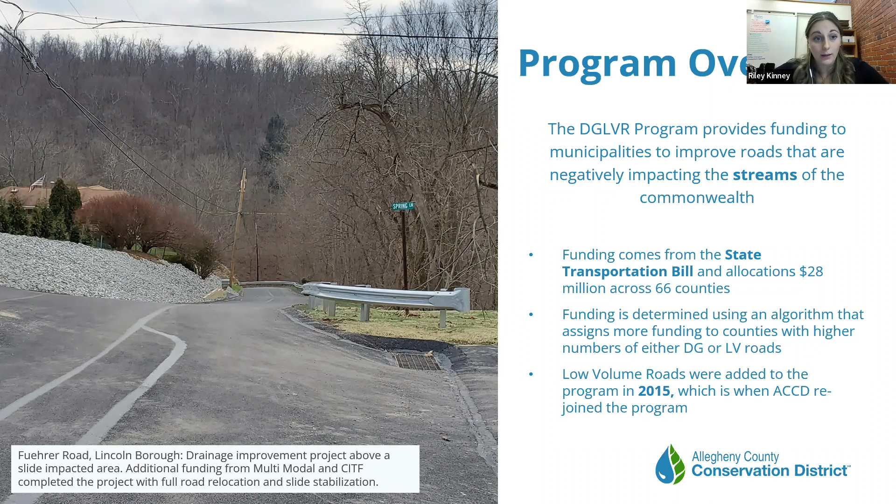The entire project involved drainage improvements on the upslope side of the road and relocating the road away from a slide that had occurred. There were a few slides on this hillside, but there was one in particular that first drew our attention to the road, and it was really a team effort to get this project accomplished.

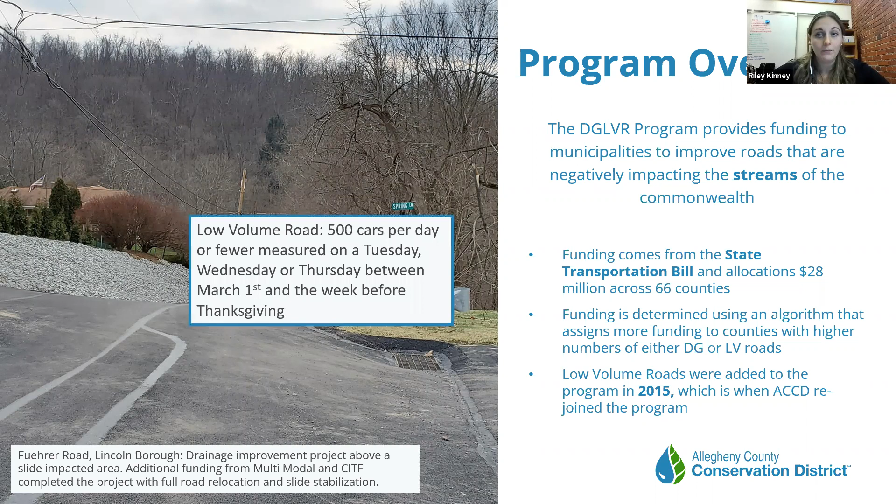In a typical year, Allegheny County's grant cycle opens June 1st and closes August 31st. We receive our program funds each summer and typically have $80,000 to fund dirt and gravel road projects and $215,000 to fund low volume road projects.

This year is a little bit special, so we are actually opening our grant cycle tomorrow, March 1st. We will be accepting applications on a rolling basis because we have more funding than ever to give to our municipalities. We have about $180,000 for dirt and gravel road projects and $600,000 for low volume road projects.

If this is your first time hearing about the program, or maybe you've had some ideas for projects in the past and haven't submitted an application, this is a really great year to get your project through the door because we have so much funding and we're really looking to help out as many municipalities as possible.

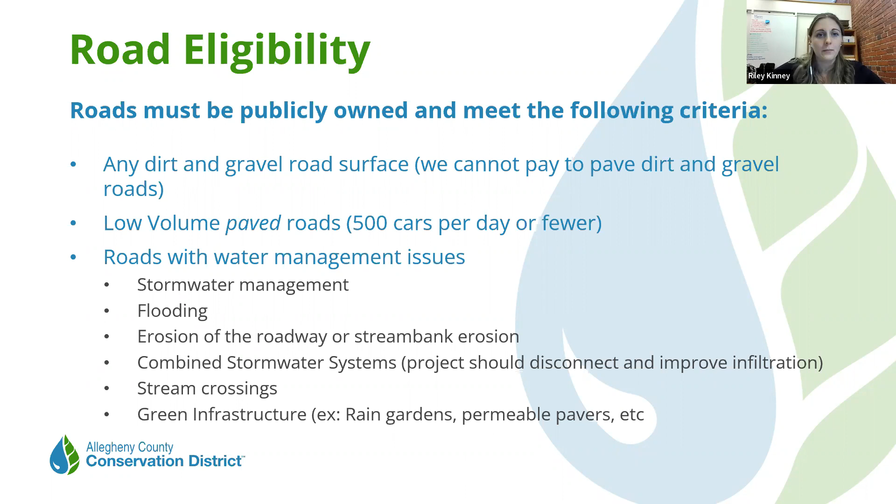I would categorize our applications that we typically receive in Allegheny County into three main categories. And this is what I'm really going to focus on for this presentation. But again, if you have another type of concern, like a stream bank stabilization project, or a dirt and gravel road that is really eroded and kind of falls outside some of the scopes of these drainage improvement practices, it's something that I would love to come out and take a look at, and we can talk through some solutions together.

So when we're looking at drainage improvement, we're looking at improving infiltration, disconnecting drainage patterns so that we're having a smaller volume of water exiting through our drainage features, reducing the amount of water on the road surface and also the water that could be saturating the road base. All good things that are great use for program funding.

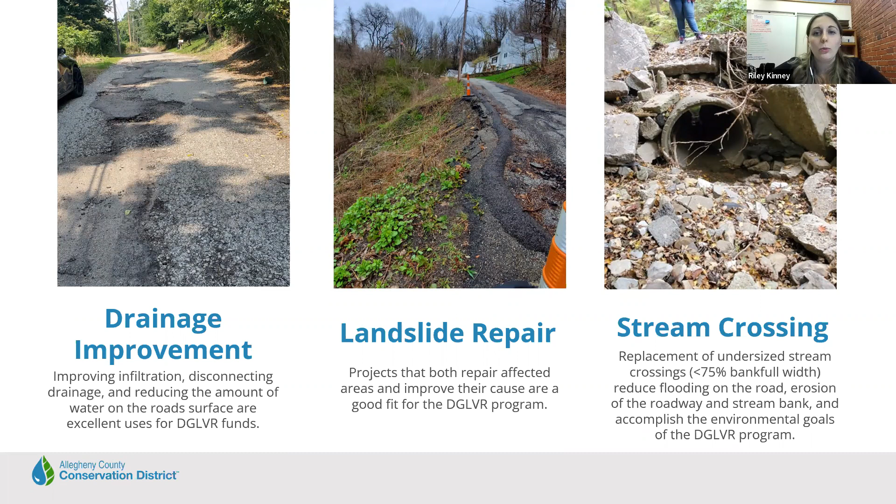Another really common project that we see in Allegheny County is a stream crossing replacement. This stream crossing is in Brentwood Borough, and we will be replacing this crossing coming up here in 2023. So any crossing that is not meeting at least the bankfull width of the stream, anything under 75%, that is eligible for replacement using dirt and gravel road funds. So replacing these undersized crossings can help to reduce flooding on the road, erosion of the roadway and stream bank, and then also, again, accomplishing those environmental goals of the program. So re-establishing natural stability in the channel, improving passage for aquatic organisms, and overall rehabilitating that stream environment.

When you're thinking about what kind of road project you might want to do, the first thing that you need to do is identify what kinds of roads you want to be looking at. And there's a couple different ways that we recommend you go about doing this. So, any road that might have water management issues, that's a really great place to start. But there are some other categories of roads that we might consider as well. How high does a road fall on your municipal priority list? Are there roads that are constant maintenance headaches, going out and unclogging drains or going out and patching the road time and time again because potholes are a major issue?

There could be roads that have really hazardous conditions, lots of icing, especially in the winters we get here in Pittsburgh. We have a lot of steep slopes, and controlling that water in the wintertime is really critical to making sure they stay safe. Or, maybe there's also a road where you have a lot of residents that are unhappy with their road condition. They say the squeaky wheel gets the grease, and sometimes that's the best place to start, is roads where you have a consistent number of complaints.

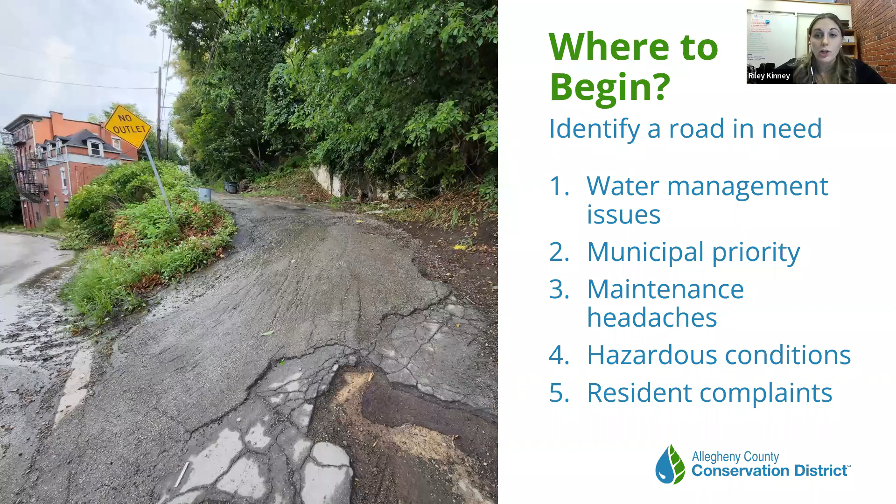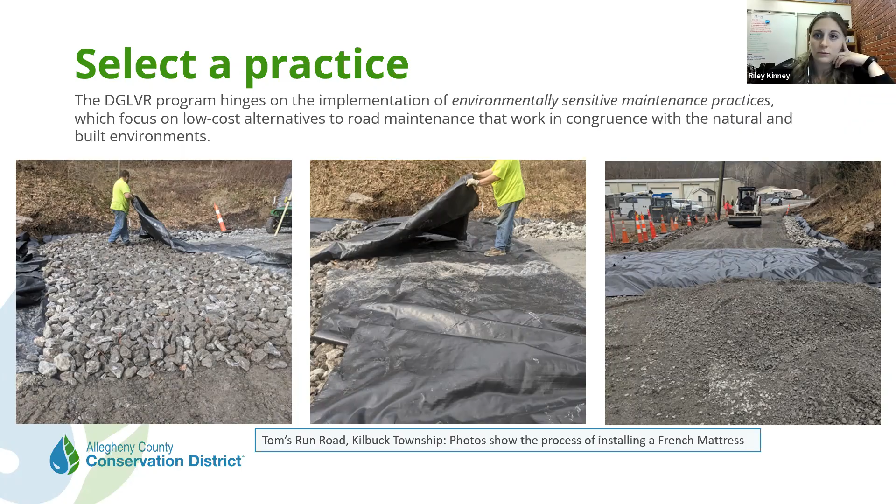The environmentally sensitive maintenance practices go beyond just a concept. It's also a certification that's required to apply for the grant program. The ESM training is offered through the Penn State Center for Dirt and Gravel Roads. It's 2 days, and they have locations across the state. It runs from 8 in the morning until 4 in the afternoon. Any municipal staff can attend, but we typically recommend someone who would be involved in project selection or road maintenance be the municipal representative.

This training is required to apply for the grant, but the concepts are really useful for general road maintenance. A lot of our municipalities here in Allegheny County are operating on small budgets, and so knowing a good set of tools in your tool chest that can be low-cost solutions to handle some of your big headaches is a really useful set of information to have.

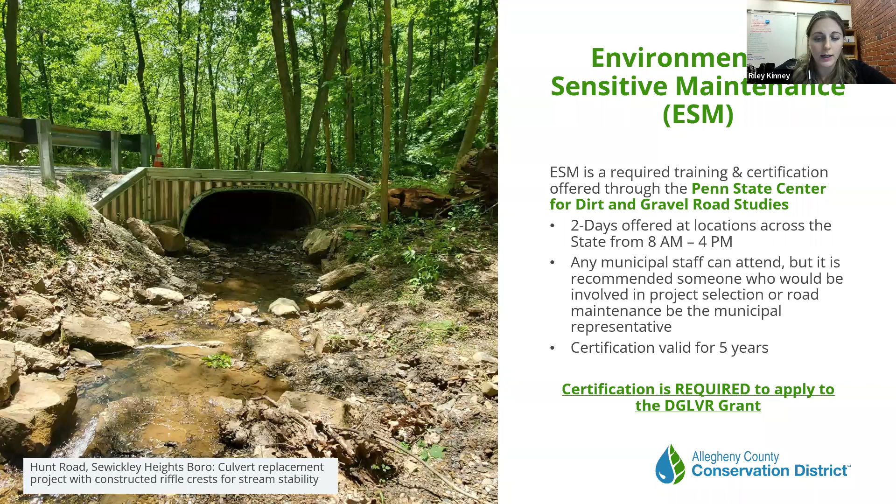If you're interested in signing up for an environmentally sensitive maintenance training this year, you're in luck, because there are a lot of excellent options that fit very well in our grant cycle. The first training date is going to be April 12th and 13th at Seven Springs. Anyone who's participating in the Allegheny League of Municipalities conference this year, this ESM training is the Wednesday, Thursday before the conference. So it's a great opportunity to do both and get a lot of information on resources for your municipality. But if you can't make that one, that's okay, because there will be another training offered on May 16th and 17th at the Pittsburgh Marriott North in Cranberry. And then later in the summer on August 16th and 17th at the Doubletree by Hilton in Washington County.

If it's the first time your municipality is going to be certified for ESM, ACCD is offering mileage and hotel reimbursement up to $300 so that we can get as many new people certified as possible. The certification lasts for 5 years. So getting it taken care of now, you can see how it helps you apply for the grant, and also the benefits of being able to incorporate those practices into your day-to-day.

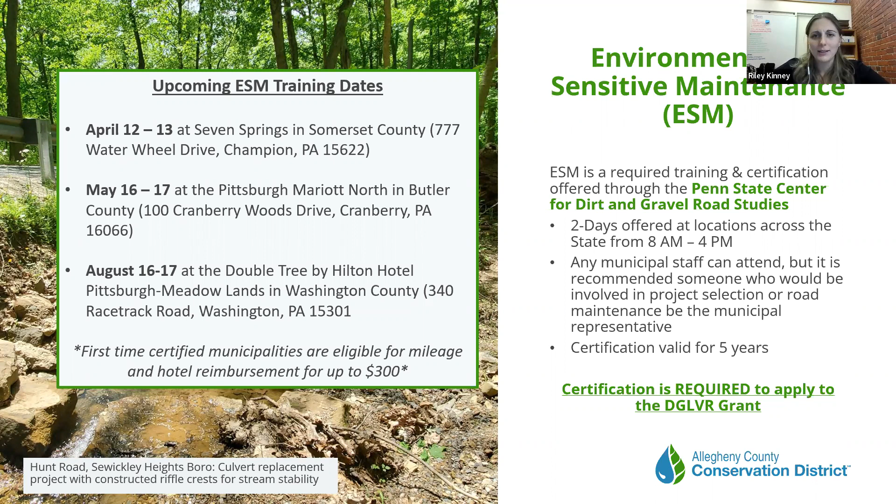You've identified a road project, you have signed up for your ESM training, or you already have your ESM training, and now it's time to look at what practices specifically you're going to be implementing on the roads. And for today's presentation, I really broke it down into the drainage, the slide repairs, and the stream crossings, because that's a lot of the applications we get here. But again, if you have something else in mind, I'd love to chat about it.

But starting off with our drainage practices, this is a picture of the road we repaired in Braddock Hills, Montana Avenue. This was a complete drainage project that we worked on that heavily featured under drain with cross pipes. This is a great practice for seeping hillsides. It's a good practice for areas with ample room in the right of way. With a good amount of room in the right of way, we can make sure that we have lots of cross pipes, which allow for small amounts of water to be discharged at each interval. This reduces the pressure at your outlet and keeps your outlet stable, reduces your overall need for maintenance because it's less wear and tear on each of these individual sites.

And having a lot of room in the right of way allows for that water to be discharged with minimal concerns from your residents who might think that this practice would increase flooding on their property. But what we're really seeing in the field doesn't match those concerns. And if you want to do a project that has cross pipes and might have less room in the right of way, we can definitely come out and talk to your residents and alleviate any concerns that this practice might not work, because it does. And that's why we promote it.

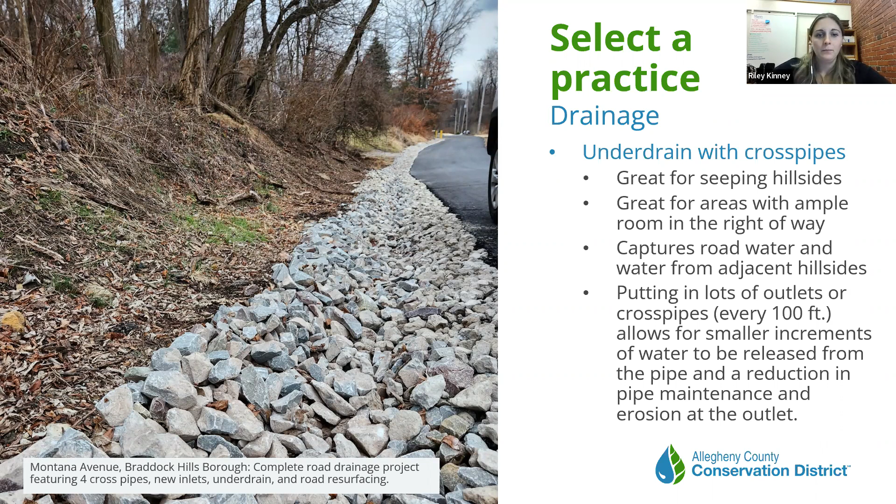Other options for installing drainage practices. We worked on this project here in Lincoln Borough. This was a very heavily populated street. There were a lot of houses, a lot of yards. It was a very steep hill. And so the best fit for the drainage practices here was to install inlets and catch basins and then have

a stable outlet point. One of the ways that we work towards the environmental goals of the program with these inlets was installing water quality inserts. And this helped also with the borough meeting some of their MS4 sediment reduction requirements. This captured stormwater safely from the road and helped with the limited amount of space that was available.

We also installed, you can see here on the right side of the picture, the kind of paved looking parking area. Those were permeable pavers, and that was a practice that we used so that in higher storm events, a low flow channel would direct stormwater to that area and allow water to infiltrate. So we were reducing pressure at our outlet.

Permeable pavers are absolutely an option if you are looking to install a green infrastructure practice that also might improve wildlife habitat or biodiversity. Rain gardens are also something that can be funded through the program.

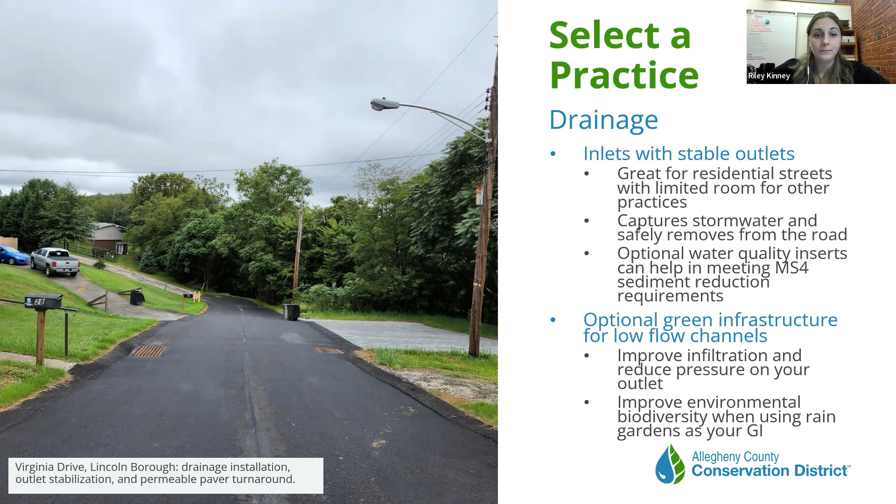Another really popular request that we get through our Dirt and Gravel Roads program are slide repairs. So this particular slide repair we completed in Sewickley Heights on Pink House Road. This was a very deep and steep repair. And so what we opted to do for this particular site was to reconstruct the hillside using a geosynthetically reinforced soil wall. And what this did was create stable layers that then had the strength that we could put the road back over top of this section.

The key to slide repairs is creating that stable hillside, but also correcting any water concerns that might have caused the initial slide. So what are we doing to capture drainage that might have been eroding over your roadway and eating away at that hillside? Are there spring seeps that were maybe contributing to the slide in the first place? For this project, we included some additional drainage in the wall so that we were capturing any spring seeps and protecting our investment.

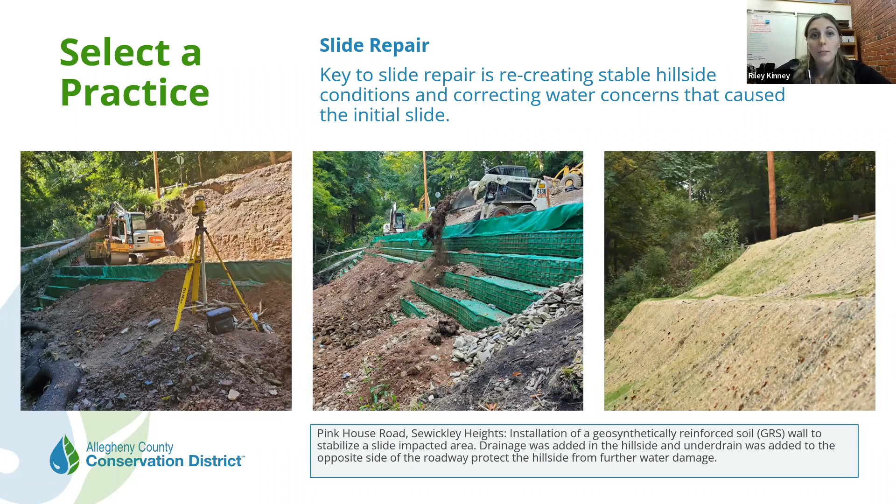In this situation, we wanted to have a little bit more infiltration capacity on the hillside itself, so we opted for a vegetated geocell wall. This created the stability that we were looking for in the slide impacted area, but also allowed for a little extra biodiversity and infiltration capacity.

We also need to consider, again, how are we going to keep the water off of our repaired slide? Do we need to have an underdrain on the other side of the road to keep water from sheet flowing over the hillside? Do we need to be capturing spring seeps and install drainage into the hillside so that we can make sure that it's not going to slide again? Are there ways that we can cut the water off at the top of the hill to make sure that it's not going to impact our investment?

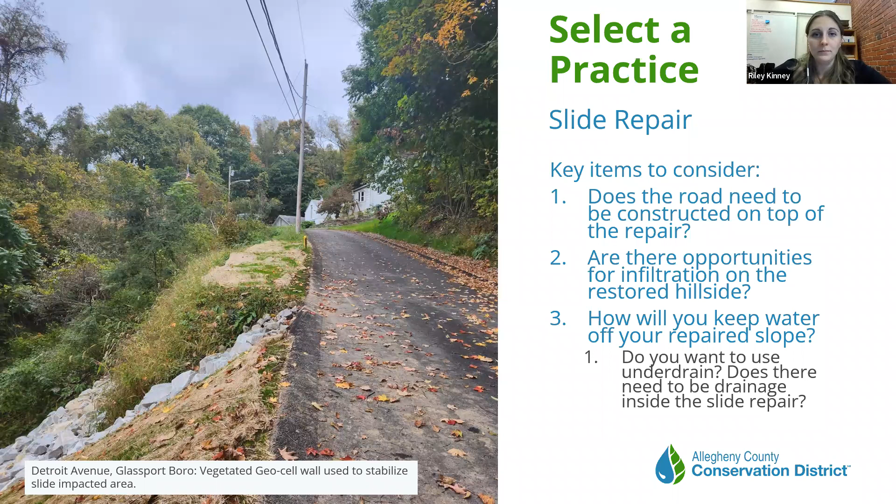Moving on, I'm going to talk a little bit about stream crossings. Stream crossings are a really popular practice here in this part of the state. We have a lot of roads that are very close, right on top of streams, and not leaving us a whole ton of room to find different locations for the road. So sometimes it has to go over a stream, and there were old ways of making these crossings that I'm sure you've seen in the field just are not working in some cases. So we can use our dirt and gravel road and low volume road funding to replace these crossings.

So when can we do that? Anytime a pipe is smaller than 75% of the bankfull width of the stream, or anytime a stream is passing through multiple pipes on a road, like if you have 2 or 4 or as many pipes as they thought was appropriate at the time, that would be immediately eligible to receive dirt and gravel or low volume funding.

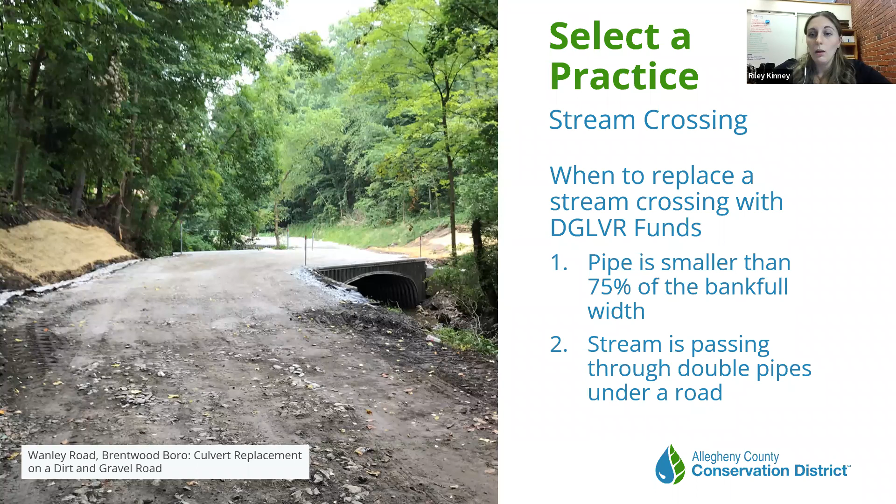We might see some stream crossings here in the county where it's a really flashy urban channel and your pipes are being plugged with tires or cinder blocks and other kinds of debris. And by making sure that our structure is sized appropriately, we're allowing for all kinds of materials to make it through and not erode the stream channel, wash out the stream banks leading up to the structure, or scour at the outlet.

An example of something that we've seen in the field that you can use as reference for this bank full width determination: if we come out and there's a 10-foot wide stream channel and there's a 36-inch concrete round pipe that has been used as a stream crossing for a long time, that pipe is only meeting 30% of the bank full width and is immediately eligible for replacement with dirt and gravel roads funding.

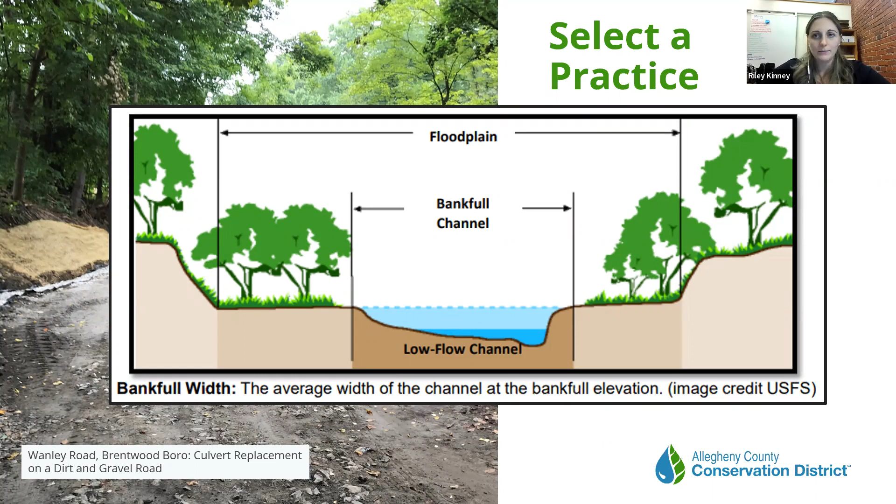Sometimes we have roads with multiple crossings on the road. And when we come up with a situation like that, we have a couple of options. Obviously, you could apply for a project that is addressing all of the crossings on your road at one time. Typically, with our funding availability, we would want to prioritize starting with one crossing, maybe phasing the project.

And when we do this, we like to try and start with the crossing furthest downstream, because as we're increasing the size of our structures, if we start with the crossing at the top of the stream, that is going to allow for so much more water to be coming out of that structure and could potentially cause even more damage downstream. So by starting downstream, we're creating larger openings and moving our way up.

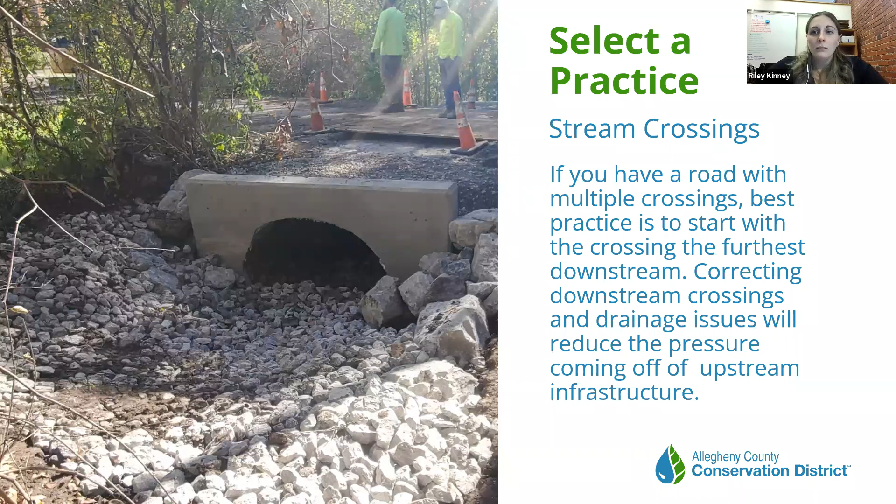There have been quite a few changes to the dirt and gravel road stream crossing policy. And if you've worked with the program before, this might seem different. If this is your first time working with the program, welcome. And this is something that we will work very closely together on if we decide to do a stream crossing.

So our new dirt and gravel stream crossing policy has a technical manual, and there is a specific section that is geared towards the engineering community. So if you are an engineer, or if you're a municipality that's working with an engineer on a stream crossing, this is a resource that's available to you to help guide through some of these changes, because it's an environmental grant. So there are things that might go above and beyond what is typically expected of a stream crossing.

Part of that is that the new policy requires the utilization of a longitudinal profile, and this is performed by the Conservation District. It's a survey that we complete that is looking for what the stream channel slope would be. How are we going to connect stable conditions that we're seeing upstream of a crossing to stable conditions downstream of a crossing? What kind of grade controls do we need to have in place? How far apart do they need to be? What might the natural stream channel really look like? And that helps us to get a good idea for what we're restoring the stream channel to look like and create the most stable conditions possible.

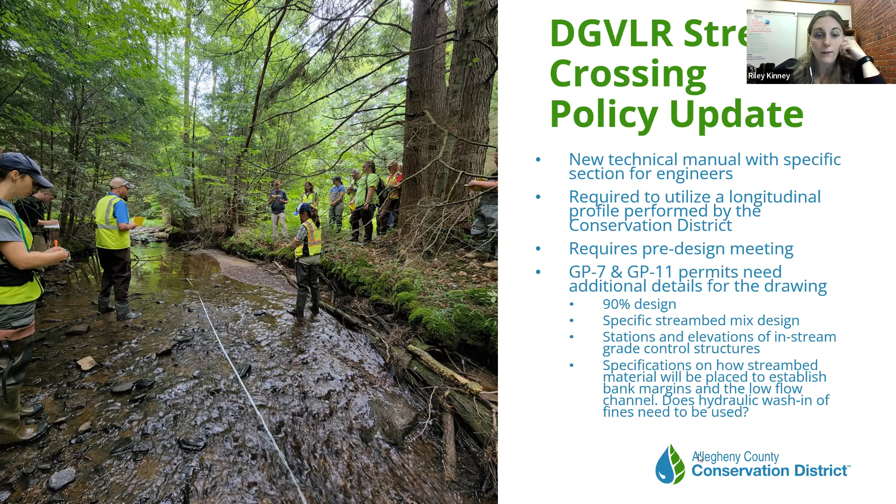I've mentioned this briefly, but it's certainly worth talking about in a little more detail. The Dirt and Gravel Roads program is very focused on having the conservation districts available to the municipalities and to their engineers as a resource. So we manage every aspect of this program, from the administrative pieces like reviewing applications, working on contracting, financial reporting, project closeout. We work on educational pieces, so doing program promotion and recruitment.

We help to promote the ESM program. We are all ESM certified. So if there are ever questions about certain practices, you can come to the Conservation District with those questions. We have ongoing staff training requirements, and then we also offer education opportunities for municipalities. We do things like field days or application writing workshops. There are a lot of opportunities to talk about this program with your conservation district representative.

We also offer a great deal of technical assistance. So if you have some ideas for projects, but you're not sure which ones might be the best, we can help with project selection. We can help to identify some best practices that could be used to strengthen or that should be left out of an application. We hold pre-application meetings, we'll pre-review permits, we perform construction oversight, and then offer final project approval.

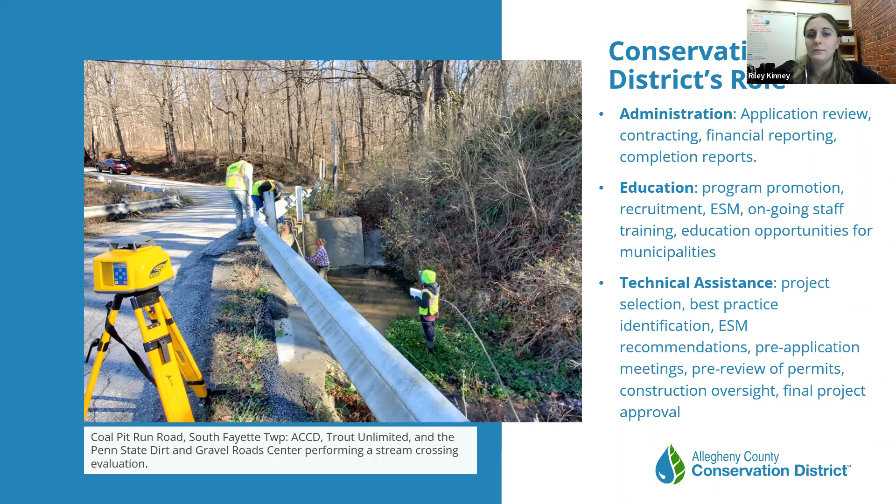You're feeling inspired after this presentation, and I don't blame you. So how do you go about applying for the Dirt and Gravel Roads grant? The first step would be to get your ESM certification. You can register for a course now, or maybe you already have your ESM certification and you're ready to move forward and schedule a pre-application meeting. Spring is a great time for pre-application meetings. We can really use this time to identify what projects are good ones to apply for immediately, which ones we should spend more time developing an application in the long run.

But because it's so wet right now, we're really able to see the road conditions and how the water is interacting with the road, best identify problems. It's a great time to get out in the field and take a look at some roads. You would then put together your application. If you have a low volume road that you're applying for, you would need to perform a traffic count. And this is something that your conservation district can help you with. And then you would apply for funds.